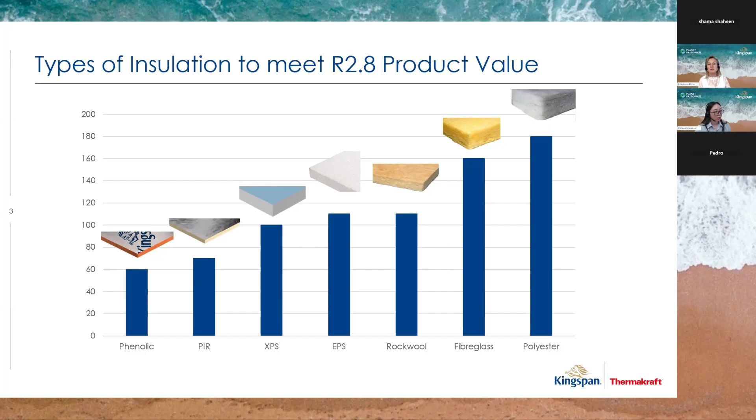So the types of products we're mostly talking about today, phenolic insulation, mean we're looking at very high R value performance and very thin thickness. We use those in applications where space is at a premium and R value is important. The range we have for phenolic insulation covers most applications within our market.

Phenolic is made with a blowing agent to activate a catalyst in the board, and then it has faces on either side. Sometimes they're fire retardant, such as our K10 Soffit board, used on the underside of a car park, which has a Group 2S rating. Sometimes they're just foil faced, such as our K7 pitched roof board and Skillion insulation, or K12 framing board, continuous to the outside of the frame. We even make an insulated plasterboard with phenolic foam and plasterboard pre-attached, which means a very fast and efficient retrofit, which I'll be talking about a little bit more later today.

One of the key characteristics of this type of insulation is that it's fiber-free, so it doesn't have the itchy glass fibers you might have experienced with other products, but it does create some dust as you cut it, so PPE is still required. It is CFC and HCFC free, so we don't contribute to global warming in these aspects. And as I've mentioned, very high R value per thickness - Kooltherm at 100 mils is an R4.7, so very hard to go past that in terms of performance of R value per thickness.

Low flame and smoke emission, and of course, like all the Kingspan products, it's compliant to the Australian New Zealand standard 4859. That's a standard which says we will test our insulation for the aged value at 25 years. There's quite a process to go through outlined in that standard.

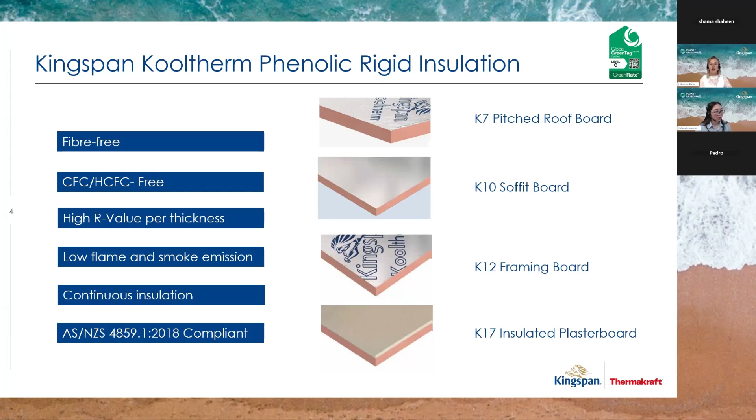And then we publish that information on our data sheets at 15 degrees Celsius, which is the temperature we need to publish at in New Zealand. So you'll find Kingspan's very strong on that compliance to the New Zealand Building Code in that aspect. All of these products have Global Green Tag Level C, and they all have an environmental product declaration as well.

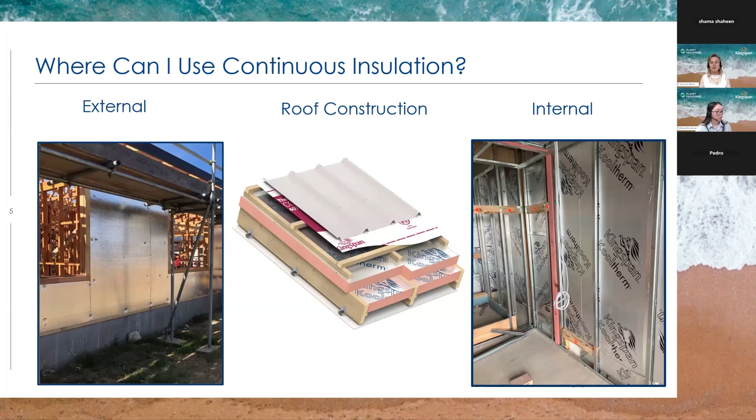So where can I use continuous insulation in my build? I can use it externally to the frame to mitigate thermal bridging. I can use it within my roof construction, and typically a skillion roof is ideal for phenolic insulation, where we're trying to achieve a very thin rafter construction, perhaps 190mm rafter, and insulate it effectively to H1, perhaps targeting an R6.6 in that construction. And using it internal to the wall, often on concrete walls. It's a key product to insulate a concrete wall effectively without condensation issues.

So when we talk about thermal bridging, what you can quite clearly see here is that the timber framing is literally draining the heat out of the building through that thermal bridging aspect. Conversely, it is also allowing cold into the building.

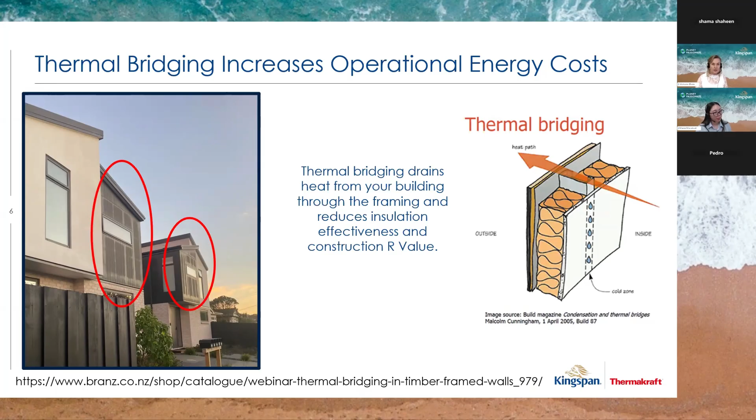Why do we care? Well, the BRANZ Beacon Pathway suggests that framing is actually 34% of the wall, but more importantly, in the H1 consultation that's underway, that is suggesting that there will be a mandatory 38% timber framing for calculation and modelling methods for H1. And if you recall, those changes in the H1 standard mean that the schedule method is out by the end of 2025, the calculation method comes in its place and modelling. So it's likely that they will also mandate the timber framing percentage in that aspect as well.

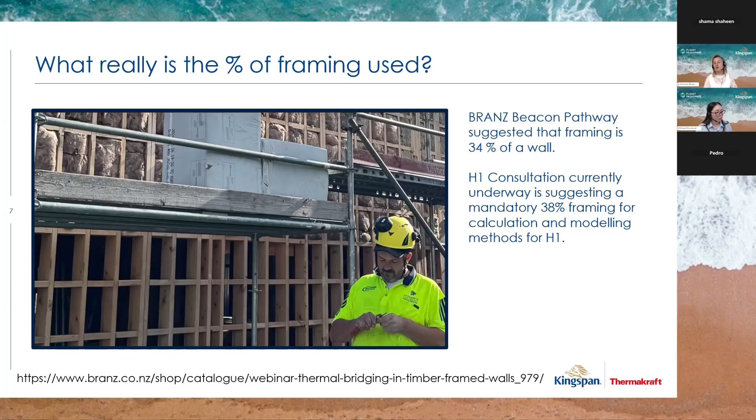That makes it very difficult to build a 90mm wall out of just glass fibre as we have traditionally done. So we need to be looking at different technologies, different ways of building to enable us to meet the thermal comfort that's been called for. Why do we also care about thermal bridging? Because basically that timber becomes a pathway for cold, condensation, water, mold, degradation of our structure in both roof and wall, and ultimately the illness, which unfortunately a lot of our housing stock in New Zealand is well known for.

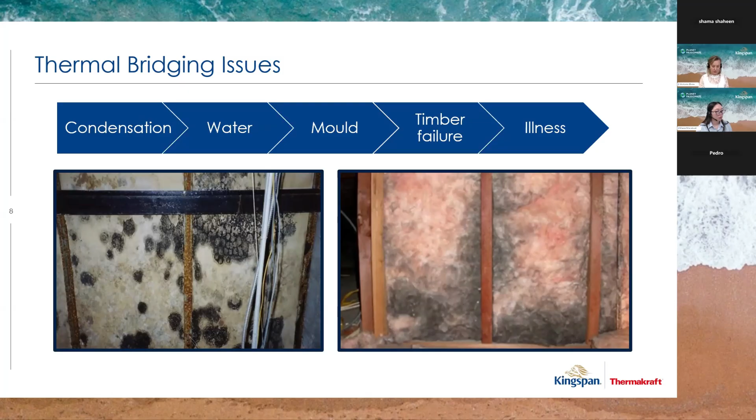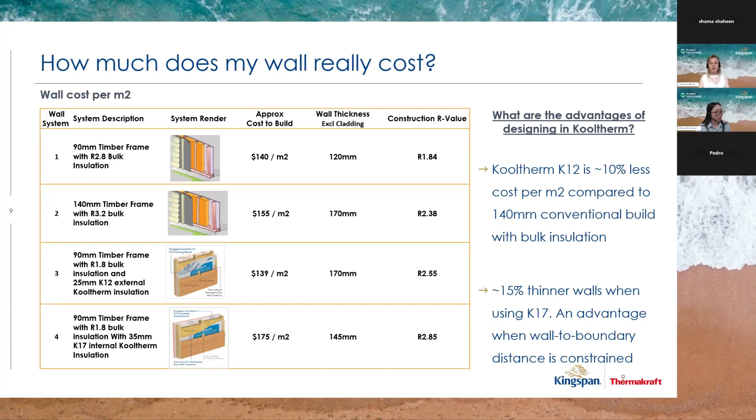So understanding the different types of products and how they can mitigate thermal bridging and really what they can give you in terms of construction R value, dollars and space is quite important.

Just as an example, this is that standard construction with Kooltherm over the external side of the frame as a continuous layer. So timber, glass fiber between Kooltherm and underlay, and then the cladding. The batten that's here, I'll just move my mouse here, is actually a 45mm structural batten. And that's so there's no change to the fixings for the cladding.

They simply stay as they are, no RFI with regard to the fixing. And that batten connection for the 45 by 45 structural batten gives us our drained cavity, but also more permanently secures the continuous insulation to the frame and has been BRANZ tested for performance as well. So it will take cladding up to 80 kgs for that connection and design there.

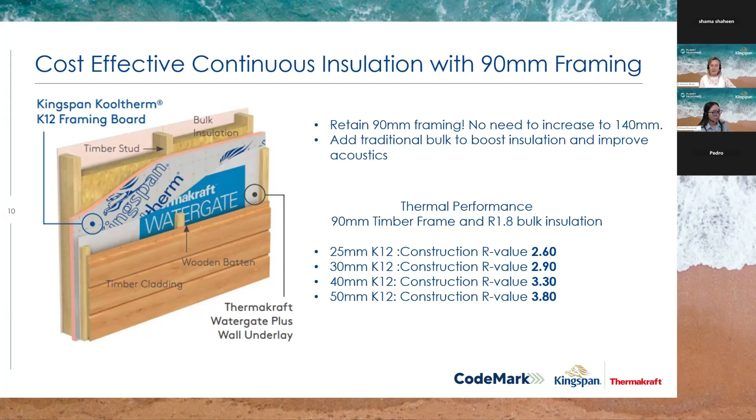So a little bit of a system going. So you can see with changing the level of Kooltherm that you have on the external side of the frame can give you some very different R values, again, giving you a lot of flexibility in your wall constructions to meet the calculation method that you may need.

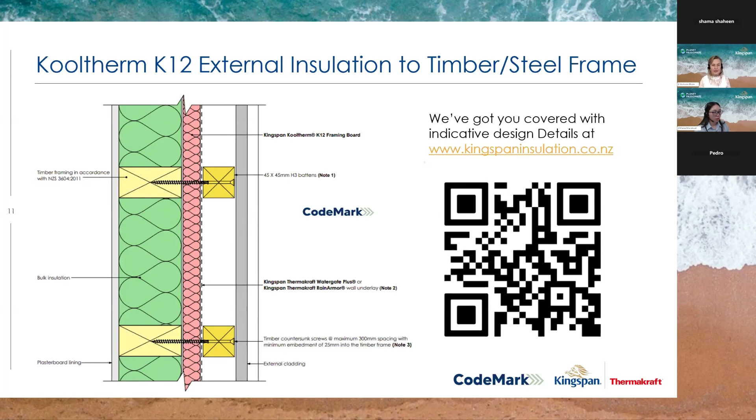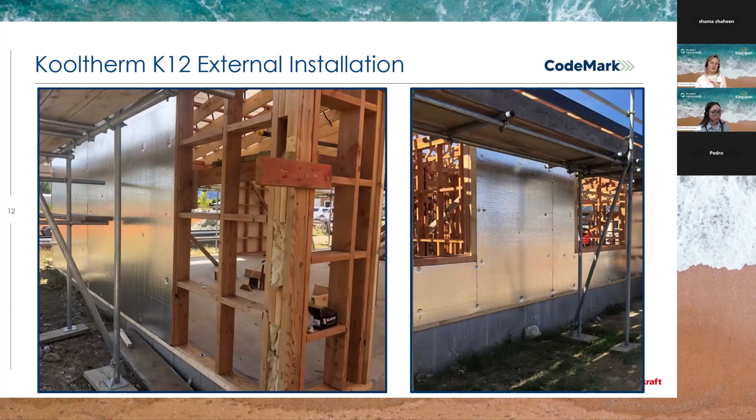The detailing around the window is very simple. Creating a hard edge gives a stronger window support and prevents the insulation being crushed. There's quite a variety of ways this can be detailed, but this is very common and very easy to build with.

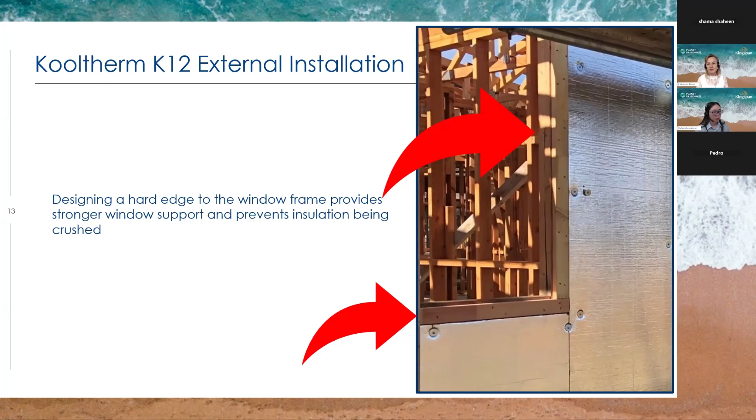We also like the use of a self-adhesive underlay with either rigid substrates such as the fiber cement, plywood, rigid air barriers such as James Hardie, but over continuous insulation, it means that there's no piercings with screws and so on through the continuous insulation.

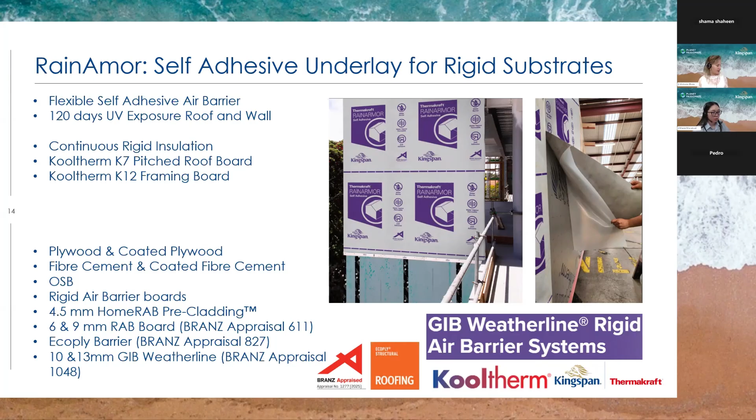RainArmor will simply self-adhere over, the laps will be sealed, and most importantly, it has 120 days UV exposure. So now you can carry on, put your cladding on in your time and you don't have the issues with that amount of UV exposure for both roof and walls.

One of the things we often look at is continuous insulation on concrete walls. Now, here in the technical team, we do construction R values and dew point analysis for wall and roof construction. That's part of the service we offer for Kingspan products. It's free, and you can use it to show H1 performance for your builds.

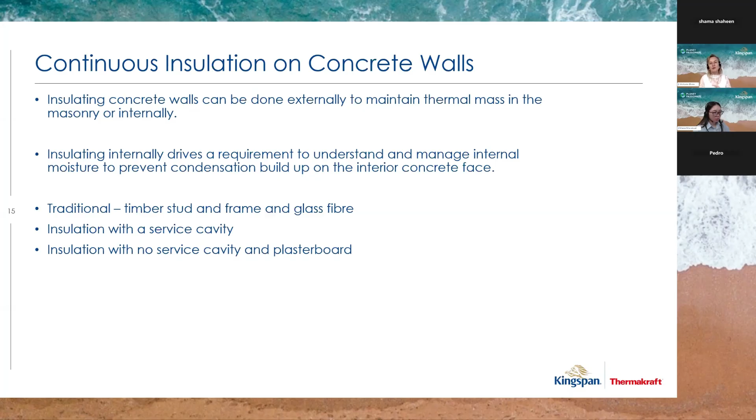But what I'd like to do is just challenge some of the ways we've been building on concrete walls for insulating. I want to take you through that. Traditionally, we might have built a concrete wall and insulated it with a timber stud and frame and fiber insulation.

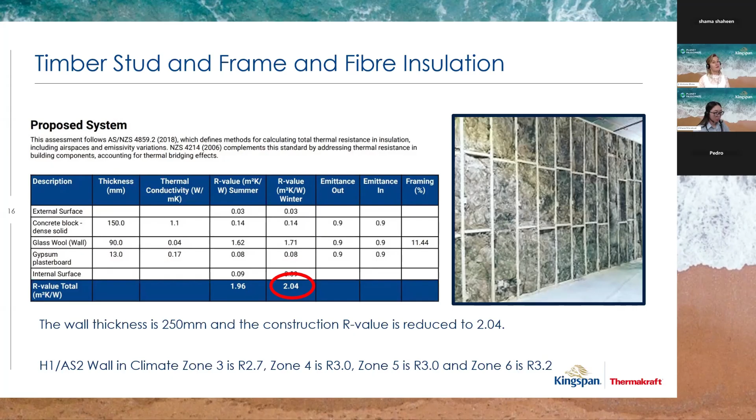H1AS2 and climate zone 3 is R2.7, 4 is 3, 5 is 3, 6 is R3.2. So in a calculation method, it's still going to contribute, but not as much as you might need. That's not actually the problem. The problem is how this wall construction performs in terms of internal moisture management. The glass fiber is a very vapor-open type of insulation.

Here's an example of our dew point analysis. If this surface is the GIB or interior lining, and we have the insulation coming through, where these two lines meet on the concrete wall, with a circle with number 3, is where the dew point will form. So that warm air from the interior will migrate through, hit the cold concrete wall, and we get dew forming. You might be asking, how much should I be worried?

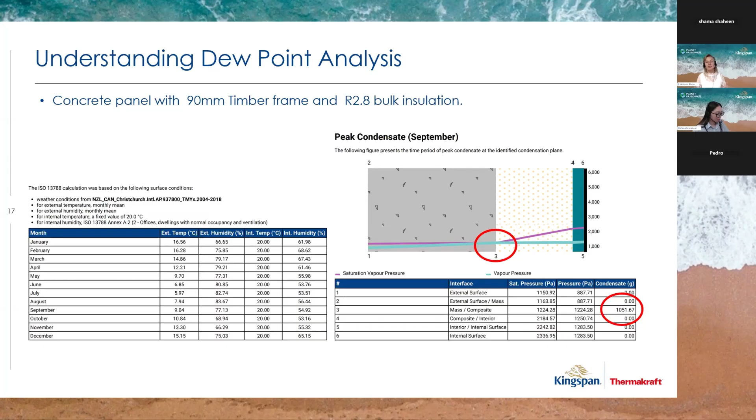Actually, yes, you should. In this model, we had a litre, or 1,000 grams per square metre, in the worst month of the year. That's a lot of water to form against a concrete wall. It will simply soak into the timber, the glass fibre, and pool at the bottom, and that's where we get the mould and degradation of the structure we've been talking about earlier.

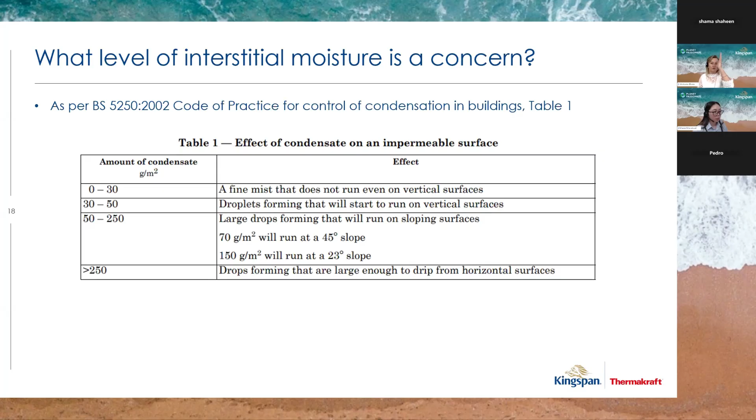Why do I know that's a problem? If I look back at the British Standard 5250, which looks at practice for control of condensation in buildings, you can see that by the time I get to 250 grams of water per square metre, those droplets are large enough to drip from a horizontal surface. We had four times that on a vertical surface. We know it's simply going to run down the wall and be a problem.

So what is the option? The option is using something like a continuous insulation, Kooltherm K12 Framing Board, on the concrete wall, direct fixed, which gives a higher R value at 2.88. In this model, we used 50 mils of Kooltherm K12, then a clip and channel system over the front to create a small service cavity, and gypsum plasterboard. The total wall thickness is thinner at 238 mils, saving 12 mils off the wall, with no condensation in that model.

This product is very vapor retardant just by the nature of the product, so we don't get that same movement of water through and condensing on the concrete wall. So a thinner construction, a higher R value construction, without the risk we've seen in traditional construction methodologies.

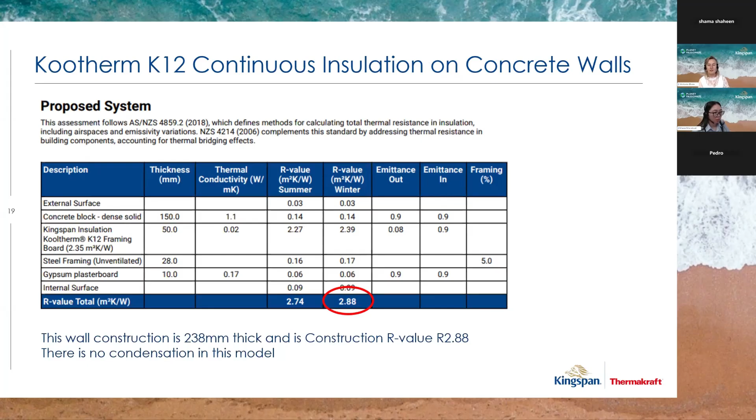This is an example of one of the details we've built for that on a block wall. You can see the clip and channel marked on the left, and this is a model we have in our office, enabling you to visualize and bring it to life, where the base of the channel, a BG clip, is simply fixed to the wall, the insulation piece fixed over it, and then the channel holds it in place to secure the interior lining material, Aqualine, GIB, whatever you wish to use, with a little service cavity to run the electrics through as well.

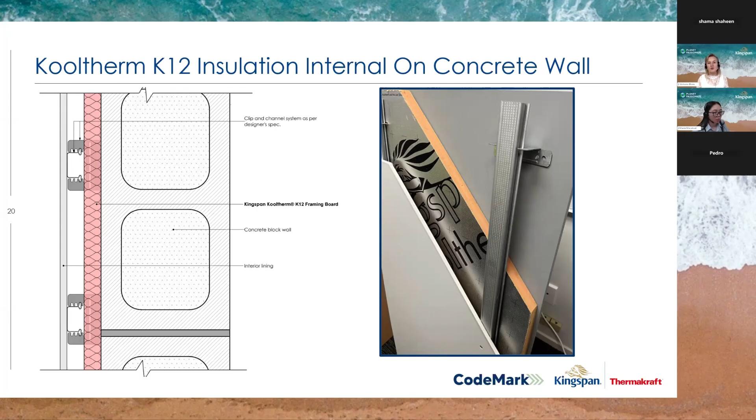For insulation that's much thicker, we might need other ways of installing the continuous insulation. Again, the continuous insulation goes hard up against the block wall, but some of the clips, for example in the Rondo range, will not accommodate the larger thicknesses of insulation.

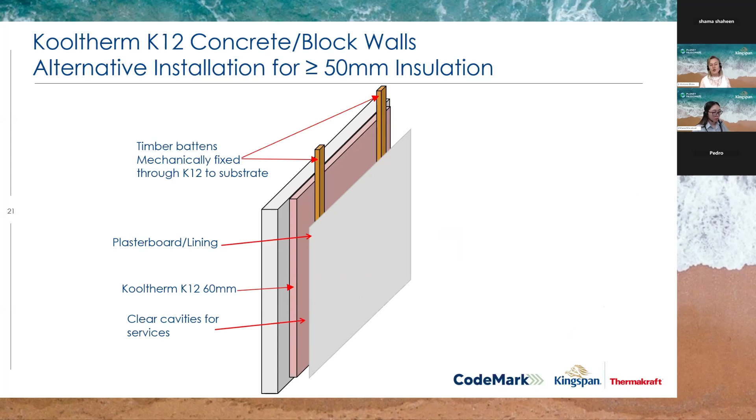So this methodology, where battens are installed in front of the Kooltherm to secure it into the concrete wall, gives not only securement of the insulation, but a structure upon which you can hang kitchen cabinets, TVs, large mirrors for hotels and so on, plus a service cavity for other aspects, and then you can put your interior lining material on the front. That's a very common technique for securing continuous insulation to the wall.

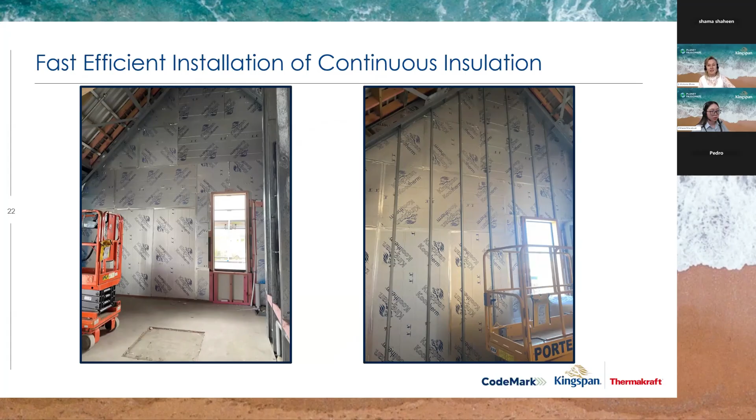This is what a great example of continuous insulation looks like. In the image on the left, you can see that the board joints have been taped as well for better vapor control. And on the image on the right, the clip and channel system has been put on, ready for the interior lining to be added next. It's a very nice, clean, simple finish, and you can see why it's called continuous insulation.

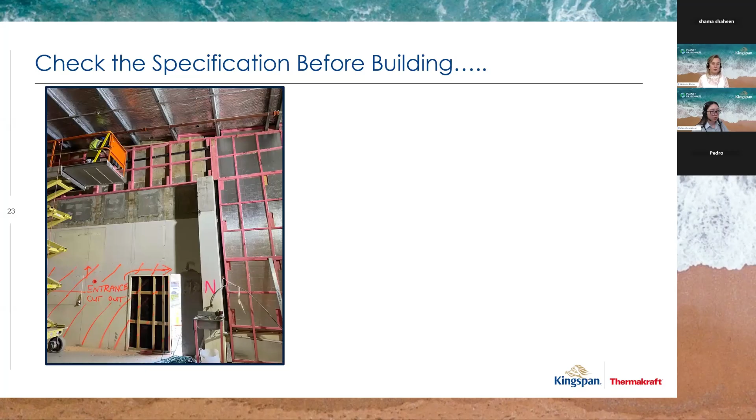But we do ask that people look at the plans and don't just go through with what they've considered to be a traditional building technique, because this particular project was specified as continuous insulation, but in this instance, the builder carried through and built a timber stud and frame. Not only did he add a lot of labor and cost to the build, he actually changed the thermal performance of that wall, because now there's significant thermal bridging, more labor cost, and a delay to the project schedule.

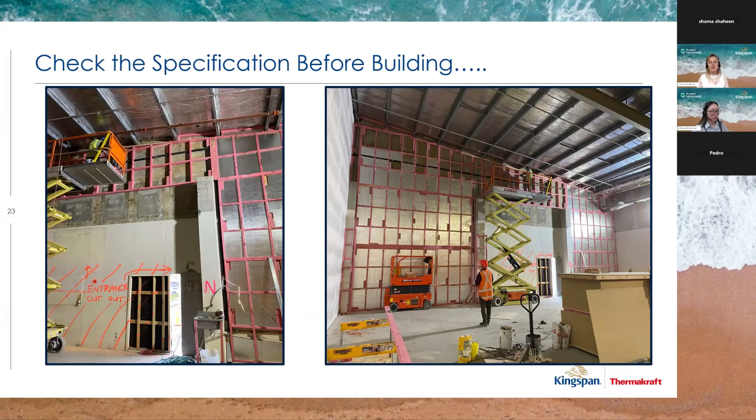So we invite you, if you are not sure how to install continuous insulation, one of our area sales managers, our technical teams, our specification teams will visit you on site, conduct training, whatever it is that you need to make sure you understand how these products go in to meet the cost and performance expectations of that project.

If you don't need a service cavity and just have a large concrete wall to fill, it's really hard to go past an insulated plasterboard on phenolic insulation like K17. It simply sticks directly to the concrete wall, and then all you have is your wet trades to finish the wall. It can be mechanically fixed or adhered fixed. The construction R values are high, and it's a Group 1S rating, so it gives you that interior surface finish that you need as well.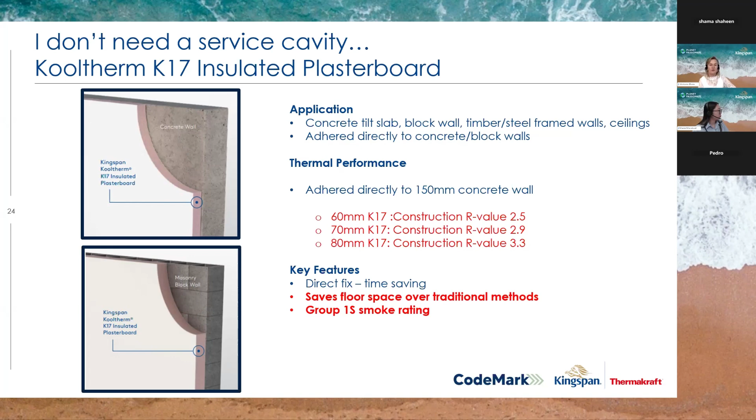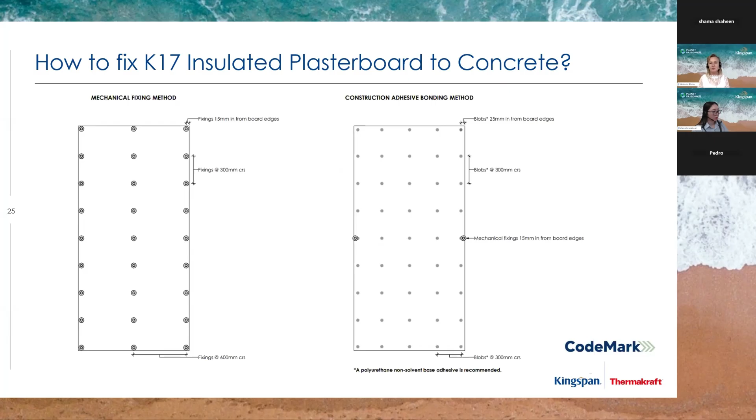And it's a very thin wall construction. You can see here the mechanical fixing method. It follows the GIB method. This is actually GIB on there, a 10mm GIB board on the front for the plasterboard. So the mechanical fixings follow the GIB guidelines, and we have a construction adhesive bonding method with a polyurethane non-solvent adhesive, blobs set through, and then a couple of mechanical fastenings mid-board just to hold that secure, sitting within the taped edges.

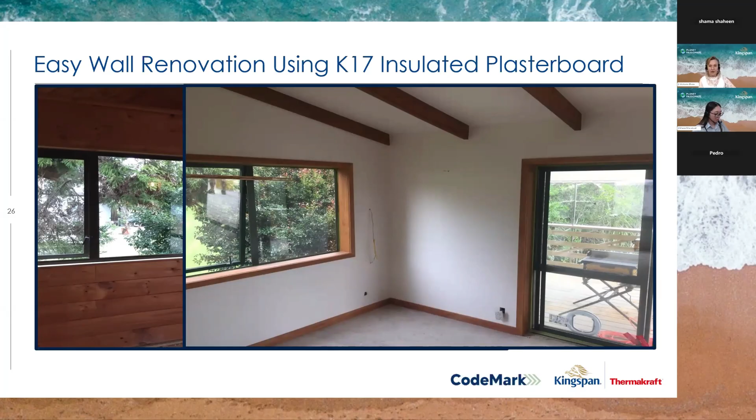We can also use this to add more insulation in a skillion roof. Perhaps if that skillion roof is in the retrofit and the roofing material is not going to be removed, we can add insulation to the underside, replacing that ceiling, either just straight over the existing jib, or in a new build, on a clip and channel system underneath the rafters. Again, giving excellent construction R value, but in this instance we're now taking a little bit of the floor to ceiling height, so there's always a little bit of balance.

That is where our technical team, specification team can certainly help, talking through the key requirements for your project in terms of height, capacity to make changes within the build, and recommending construction techniques that will help you save the most space and give you the most efficient construction.

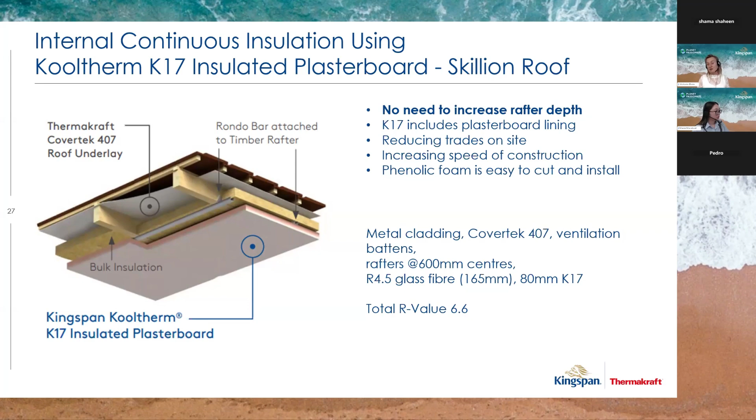When we look at skillion roofs, those that joined us recently for our roof condensation webinar will know that skillion roofs are often considered risky roofs because there's not a lot of roof space to allow moisture to move out of that roof, especially if the ventilation is compromised. Using K7 pitched roof board within the rafter means I can have a very high R value within the rafter, or as you see in the image here, a continuous layer over the rafter, mitigating the thermal bridging for the rafter.

It means that if I put an 80 mil between the rafter and 80 mil over the rafter, I can hit a construction R value of 6.7. That's fantastic. That's a really easy way to build and to keep the height of the building down.

In this image, a counterbatten system has been used where a structural batten goes up the rafter and then the purlin sits over for the roof to be secured in. The placement of the purlins is dependent upon the wind zone you're in and the performance of the roofing material that's going to be screwed through to it. But this is a very common construction, and very easy and fast to do.

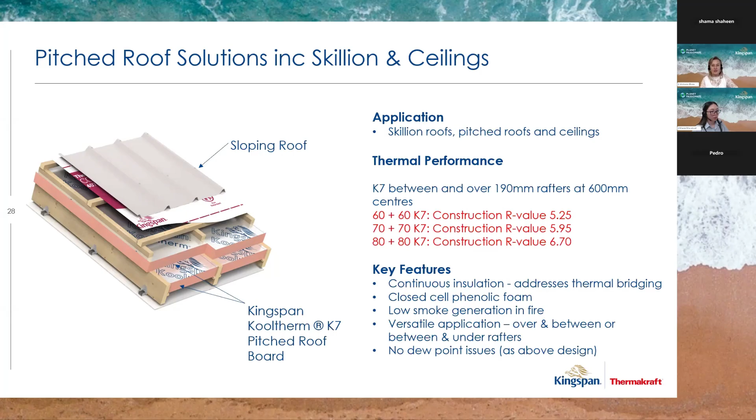We often see this in the type of retrofit construction, particularly on projects like this, which is again a Lockwood style roof. This was actually a government housing project. It's a retrofit that was done with some sarking set below.

You can see the old bituminous black paper that is in the process of being removed. The tenants are still within the building. This is all conducted in one day, so no disruption to the internal tenants, but we're looking to add thermal comfort. So the old roof is coming off, the bituminous paper is coming off.

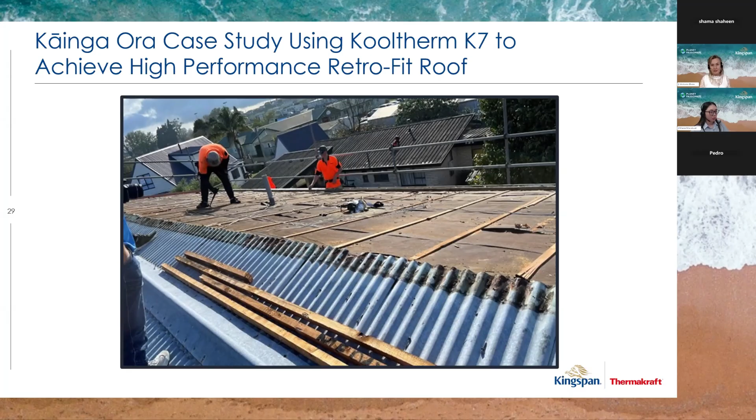Here they've simply sprayed out the electrical lines so they didn't run a drill through them or fixing. But I'll note that phenolic insulation will not damage electrical cables, will not plasticize the sheathing as, say, EPS insulation will do. So you could chase out the back of the K7 to accommodate an electrical cable if required, as it won't damage that. Of course, you do need to have the same space that you would have around any electrical cable.

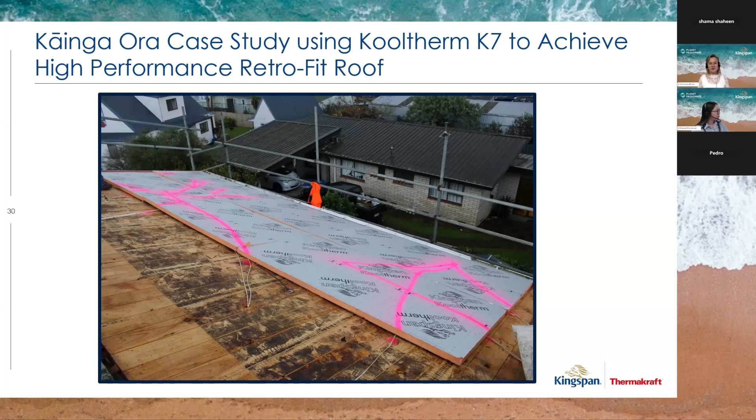So here the insulation is going over the sarked roofing. The cables have been marked out. The counterbatten system has come onto the roof. I'll note as well, you can see that he's using that counterbatten system as a roof ladder. We don't know how strong the sarking is to support their weight, but certainly the Kooltherm is not substantial enough to support somebody's weight, so the counterbatten system acts as a good structure.

And here the Covertek 407 has gone over the top. Now I'll note as well, in the coming year we will be increasing the amount of time that Covertek 407 can be left exposed on a roof. Currently it's 7 days; we'll be bringing that out to 28 days in the new year, giving a little bit more time to get roofs on where needed. But ultimately, we want the roof on the same day.

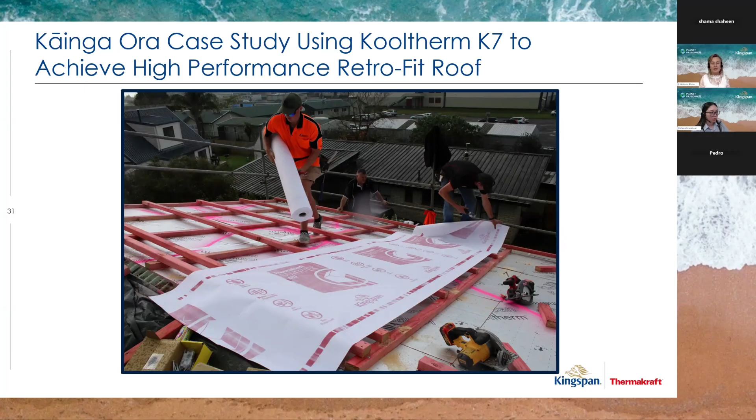And in this aspect, the roof was added on that same day, completing the project.

We have a white paper launching shortly which looks at the thermal comfort added to a skillion roof. This is the modelling for the roof we've just been looking at. You can see here there's steel sheeting, Covertek 407 as an underlay, the 90 by 45 mil counterbatten's been used, and only 50 mils of the K7 insulation on top of a 50 mil sarking. That had a construction R value of 2.97, which is really great for just adding 50 mils of insulation and keeping that height down.

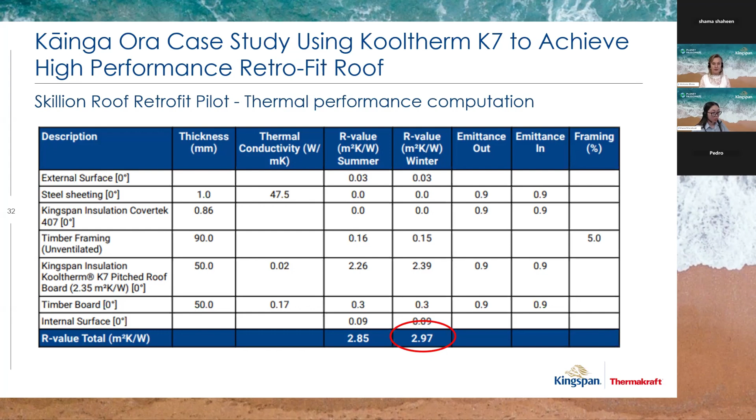I'll note as well some of the feedback I've been given about this roof, as to why it was chosen to be done in this manner, was that the repitching of the roof to accommodate glass fiber insulation was approximately $40,000. So adding K7 meant the roof didn't have to be repitched, and the project was completed within that same day. So to summarize our presentation today,

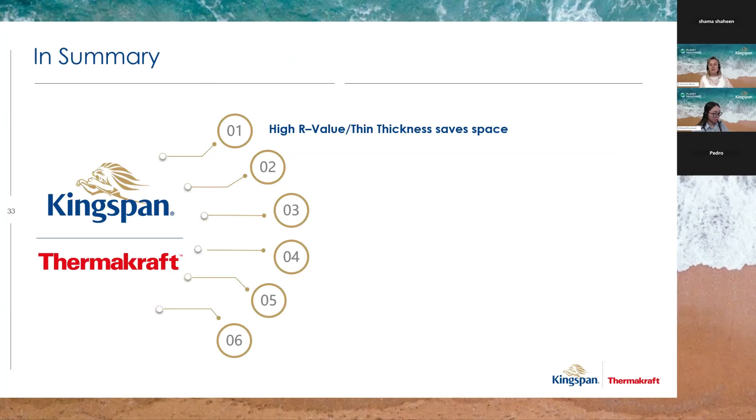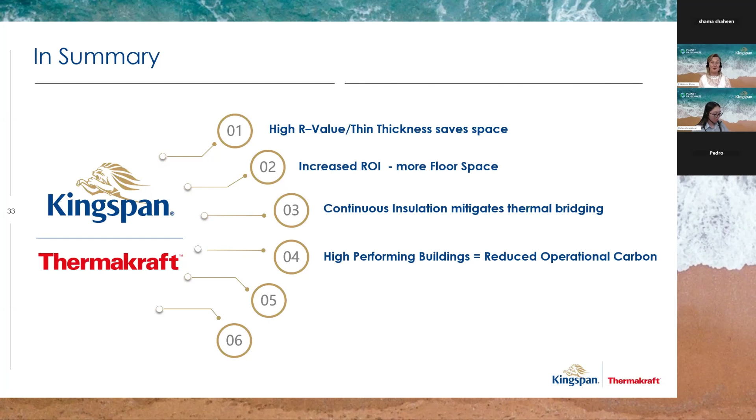Kingspan offers high R value, thin thickness phenolic insulation, which will save space within the build, increasing your return on floor space. It offers mitigation of thermal bridging, more floor space, return on investment, and higher performance building, reducing the operational carbon that we get through heating our buildings and having it escape through thermal energy, creating more thermal comfort for our occupants as well.